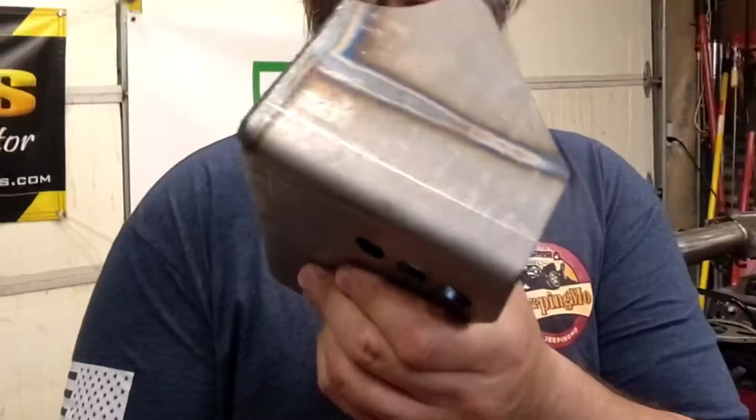Today on Jeepingmo, we're welding on track bar brackets. We had a friend of the channel reach out to me, wanted to know if we could weld on a new Synergy track bar bracket on his JK Dana 44 housing. So, always sounds like a fun project, Jeep related, and we all can learn something by it.

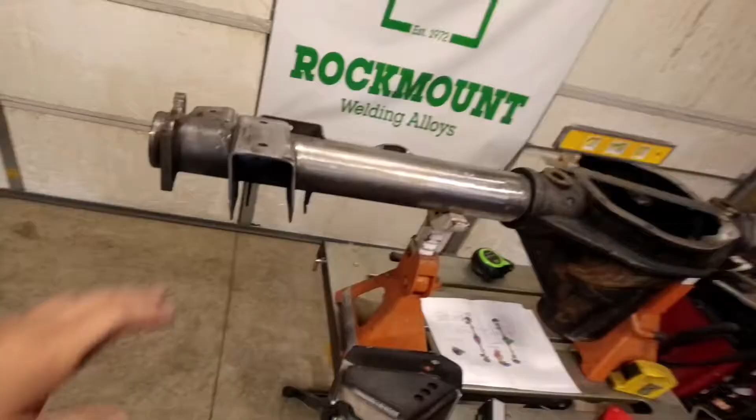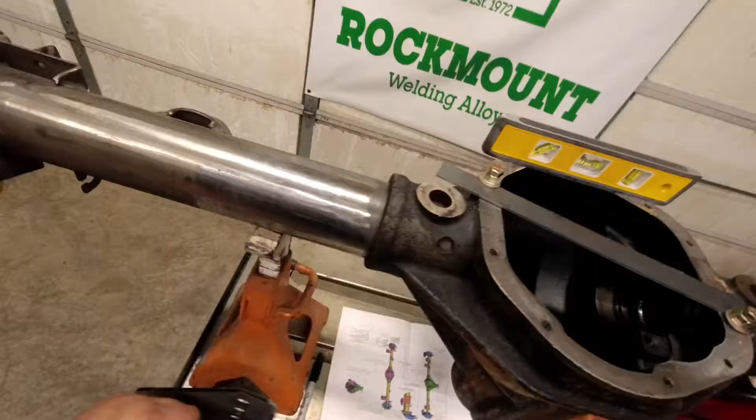Alright, so he brought over his Dana 44 housing. It's kind of nice, he's got it all stripped down. It's amazing how much lighter these housings are when there's nothing in them. So we're going to go through, show you how to locate it. And then we're going to take the housing. We're going to get it mounted.

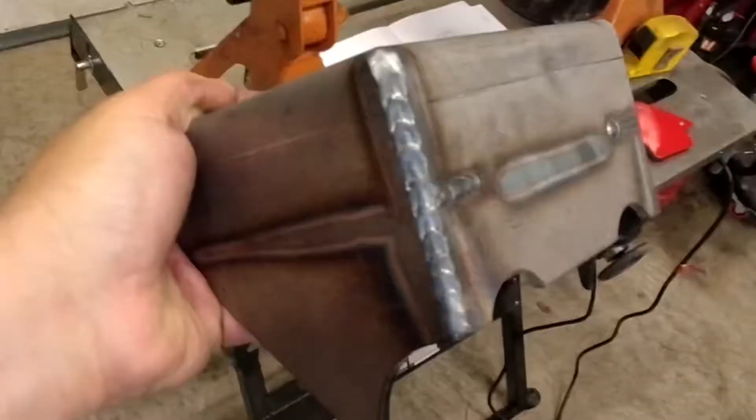Now one thing I'll say right off the bat, Synergy did a really nice job with these welds. And they also give you a really good blueprint on where everything goes. Now we're just doing the track bar bracket. We're not putting on the rest of the spring perches. He's keeping all that in place. So let me show you the MIG wire we're going to use and get this project started.

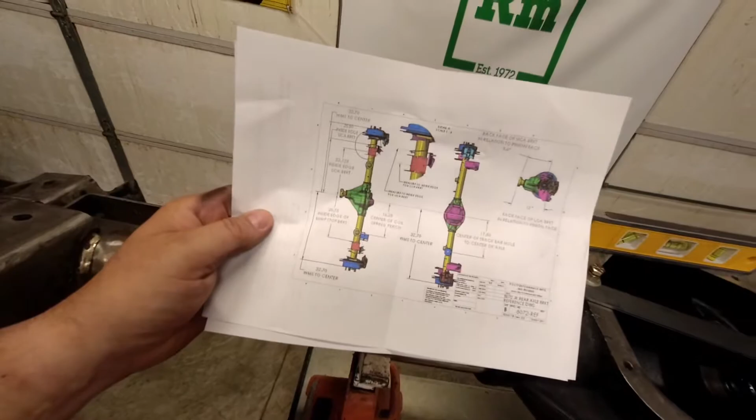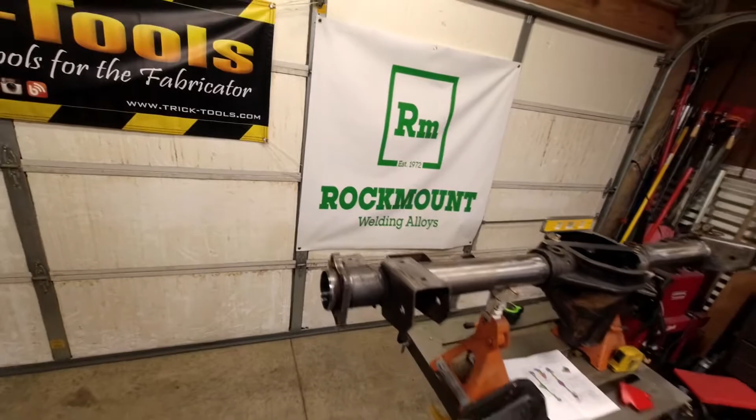Now for most general purpose welding I use this Blue Demon, and it's the ER70S-6 wire. So since we're a Rockmount affiliate and we knew we had some axle projects coming up, they sent us some of this Polaris MIG wire.

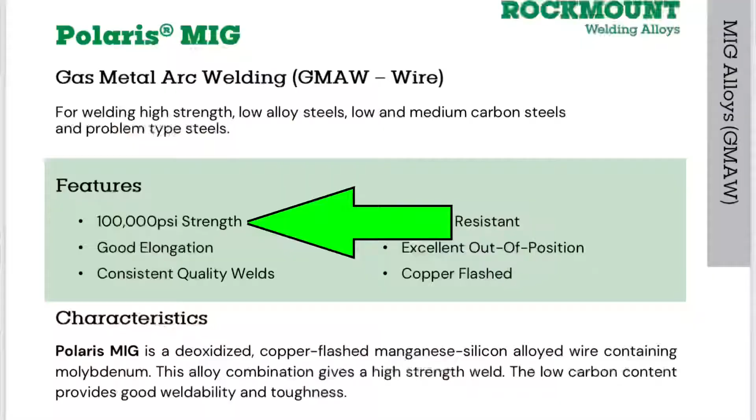Blue Demon has a 70,000 tensile. The Rockmount has 100,000, and we all know that we abuse these track bars to no end, rip them off on the trail. So we're going to put this wire in. We're using an .035 wire. That's what the welder is already set up for. We just got to change it out. We'll do a couple sample beads just to get all the settings in, and then we'll get this track bar located.

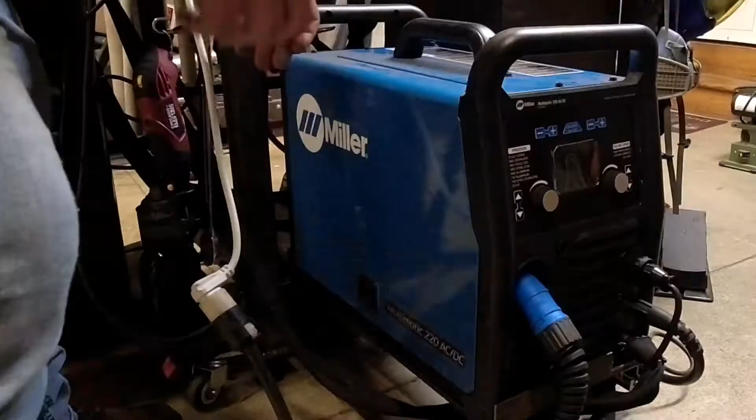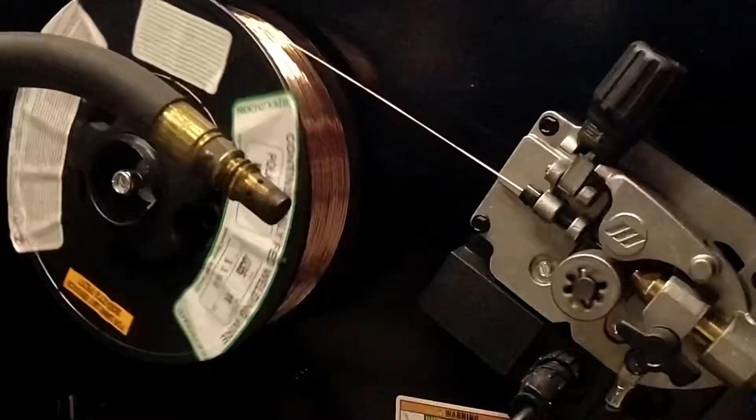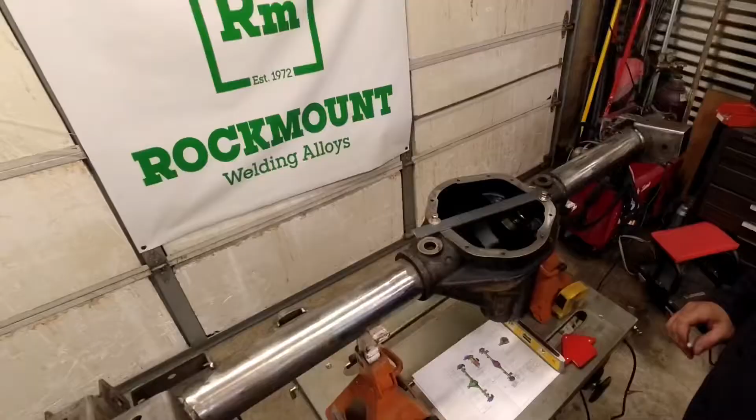Okay, so I always do a test piece before I do anything. So let's get this track bar located and get it glued on. Alright, so it's a fairly easy layout project. Now since everything's stripped down, I can't measure to the outside wheel mounting surface like the instructions say. Per the instructions it says find center and then come off that 17.5 inches. So since it's center, I don't have to worry about it. I'll come off of the flanges to find center.

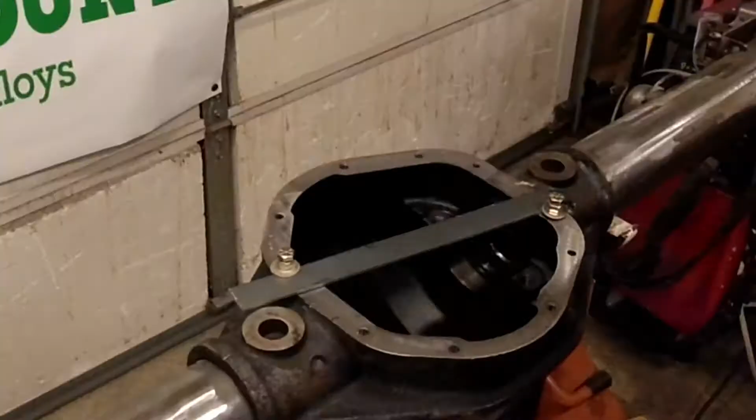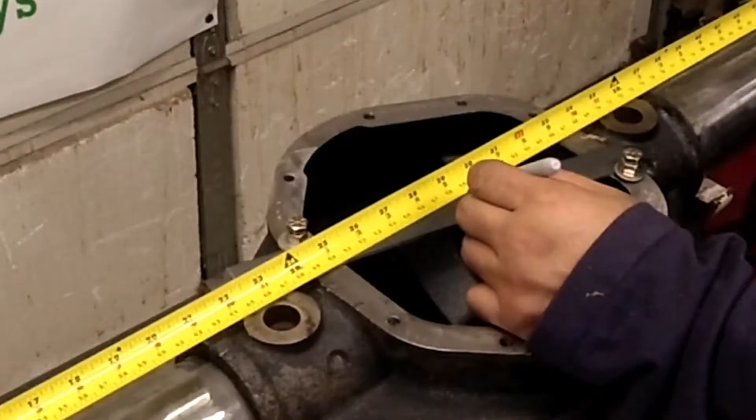And I don't have a cover, so what I did, I just cut a piece of steel and just bolted it down in center. Now something pretty cool from my woodworking days: I got a centering tape. So it says 58.5 inches on the upper scale, so I just come down here on the lower scale and it says 58.5 inches, which is 29.25.

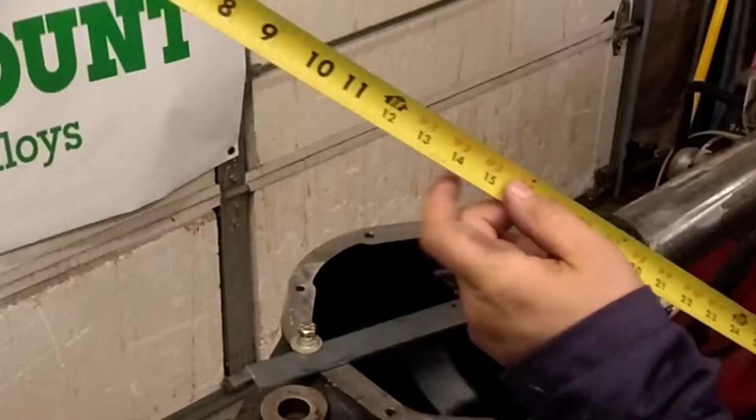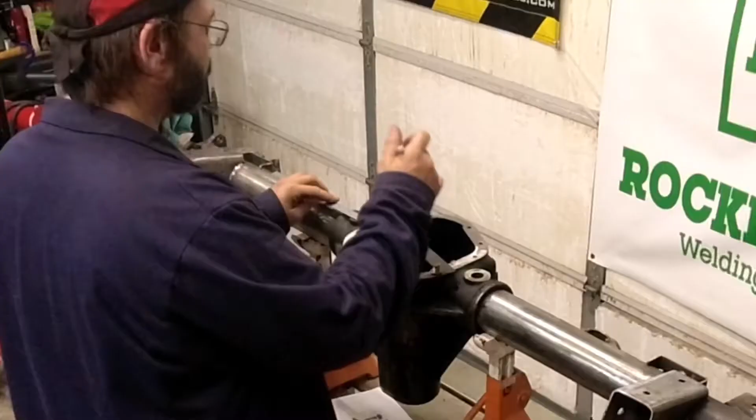And the easiest way to double check that is come from one side, so you're right about 29.25. Come from the other side and about 29.25. So we know that this is center line, and then according to the instructions it says come out 17.5 inches. Alright, so we're just going to come off 17.5 inches to the mounting holes of the track bar. Per the instructions, it's 17.5 inches from these holes to the center and leveled with the spreader locations.

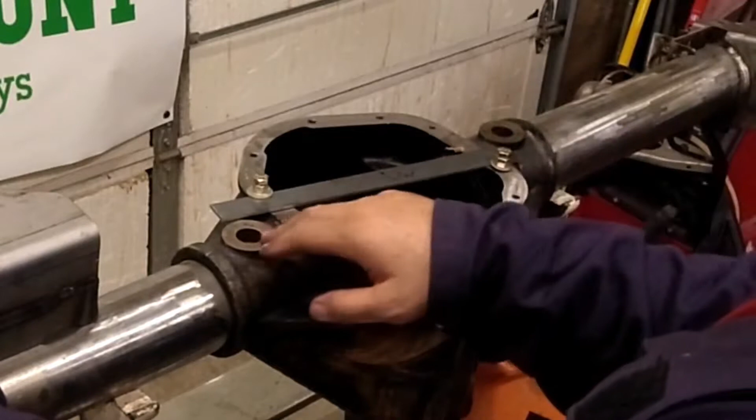If anybody ever wondered what these two big lugs are for, that's so that you can put a spreader bar in here and open it up to put your gears in. Also called a K-bar or whatever you want to call it, but it's made to go in these to open the case up so you can get your gears in. That's what these are for.

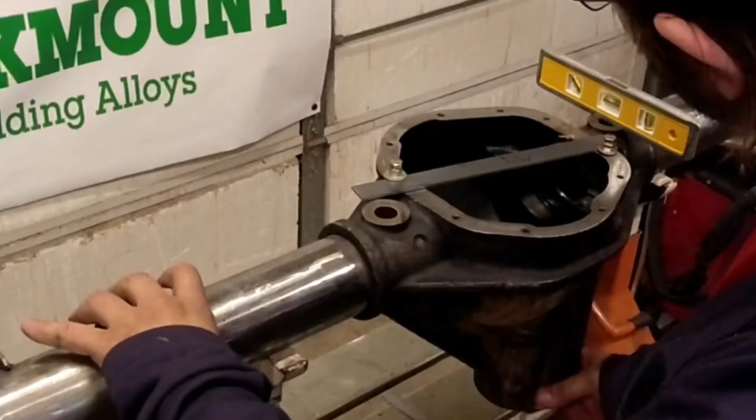So I've already got the axle level one direction. We're just going to level it the other. Now since we don't have to do an actual degree, using a level is fine, but we'll use digital as well. So we'll just come in here and we'll level.

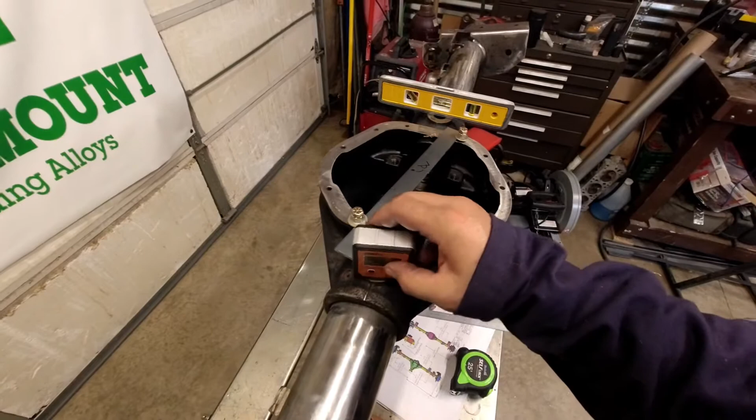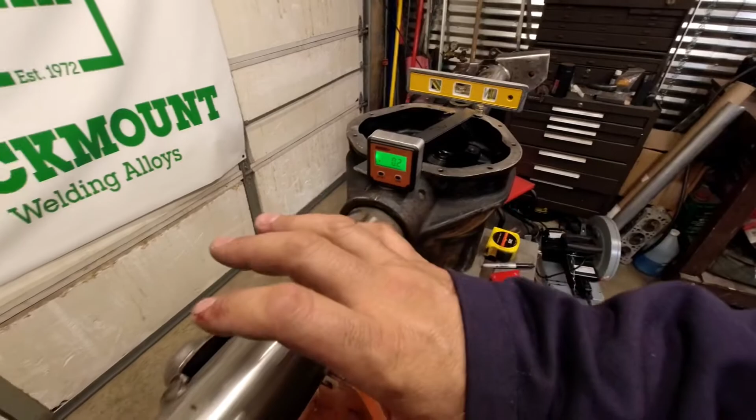Now we've also got a digital gauge that we can come in here and set on there as well. It's pretty touchy. So we're 0.02, and then what we'll do is we'll set the bracket on here and make sure that we're still level.

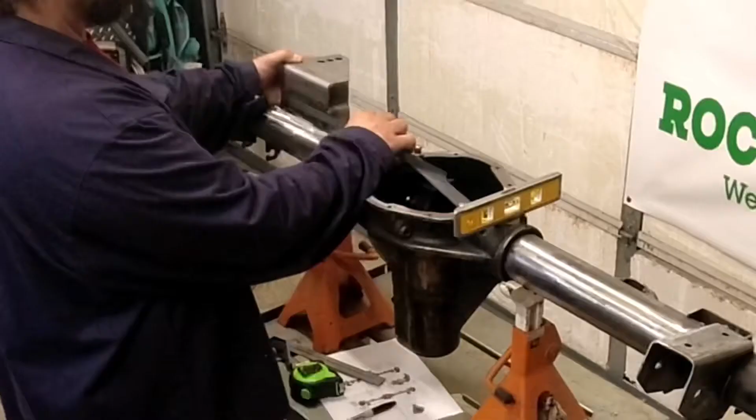To set this on here, I'm just going to line up that line. I'm just going to take a quick measurement just to make sure that we're 17.5 inches. So that's rough location right there. I'm just going to put a line out here on the edge. We're level. I'll put the angle gauge on this, and we're going to tack this dude in place.

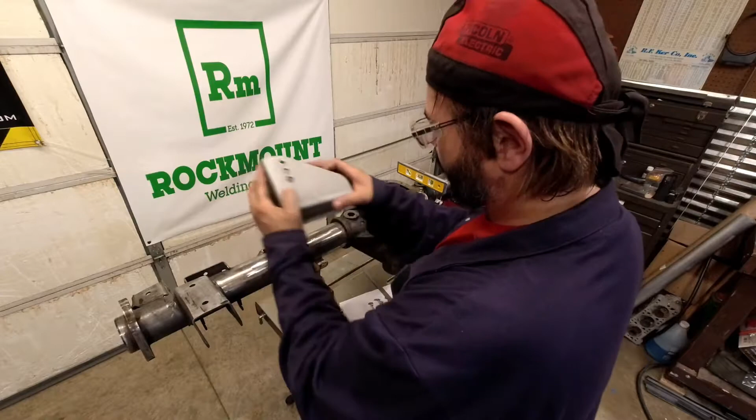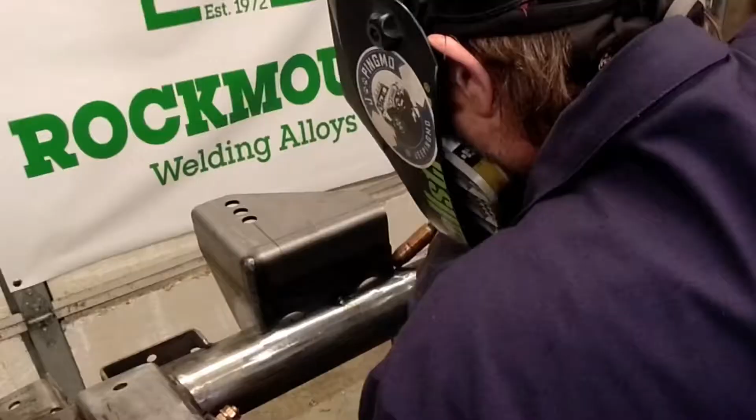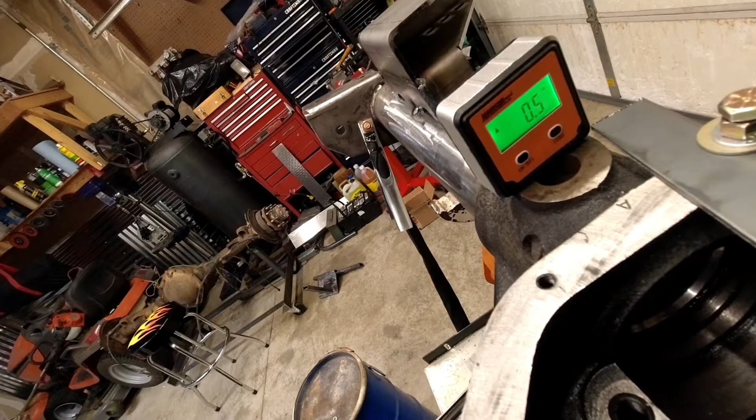To 0.6, you see a little arrow that's up. So you have 0.6 with up arrow and 0.5 with an up arrow. So I think we're good there. Now one last check. So to the center line there, we're right at within about a 1/16 of 17.5 inches. Remember, your track bar is adjustable. You could be off quite a bit. And if you don't have an adjustable track bar, you need one anyway.

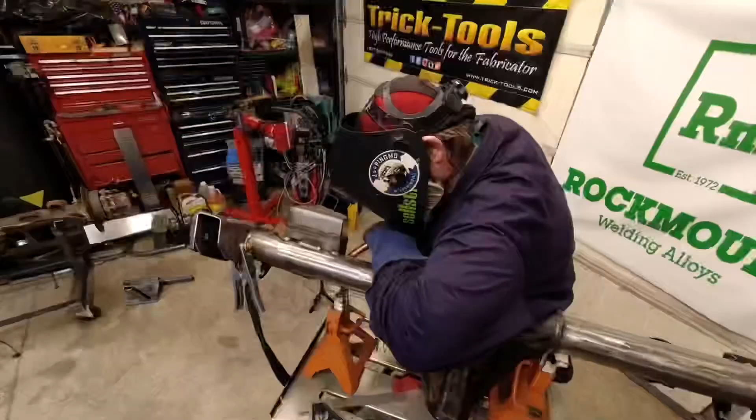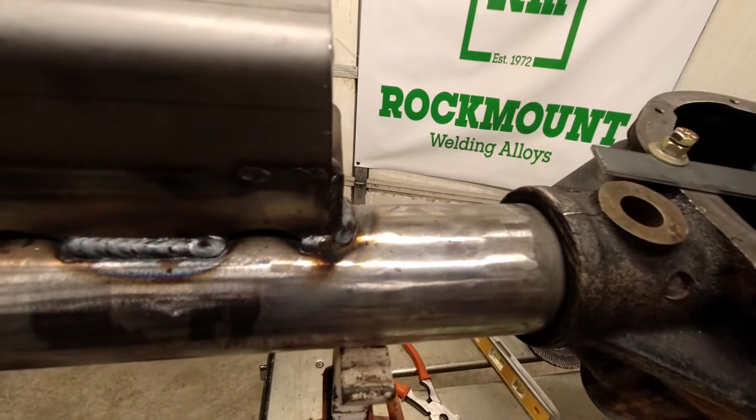Alright, so we got the track bar all welded on. I've not done any cleanup on it yet. You can see the settings must have been pretty close to being right. That coupled with that wire, there's not a lot of spatter from the wire itself, from the weld.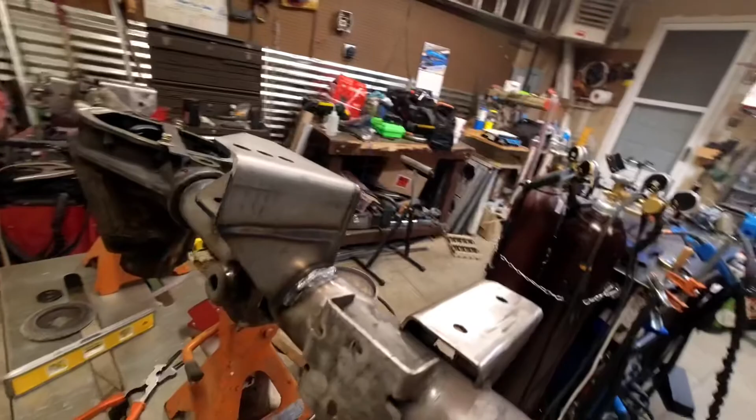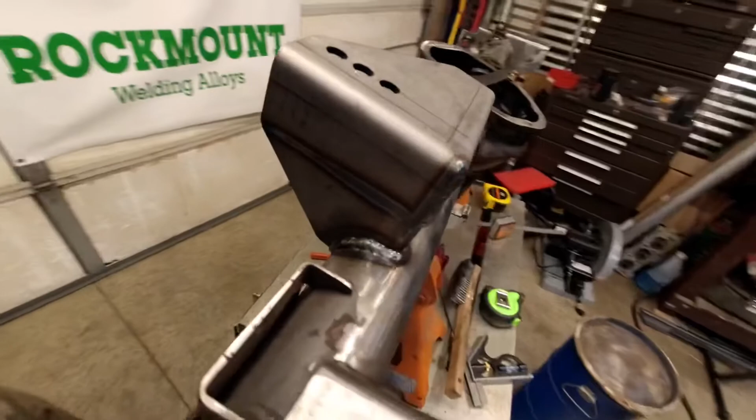So we welded it all the way around. Had one corner that gave me a little bit of trouble. That's what a grinder's for. We took that off. But I think overall it turned out fairly well. All right, so we're just going to do a little bit of wire brushing on it and have them come get it.

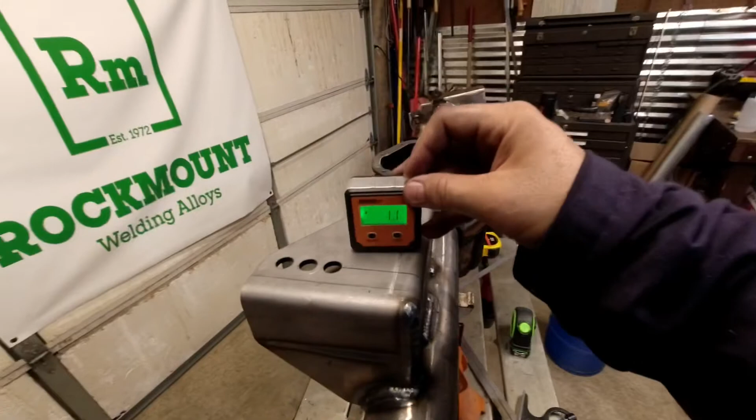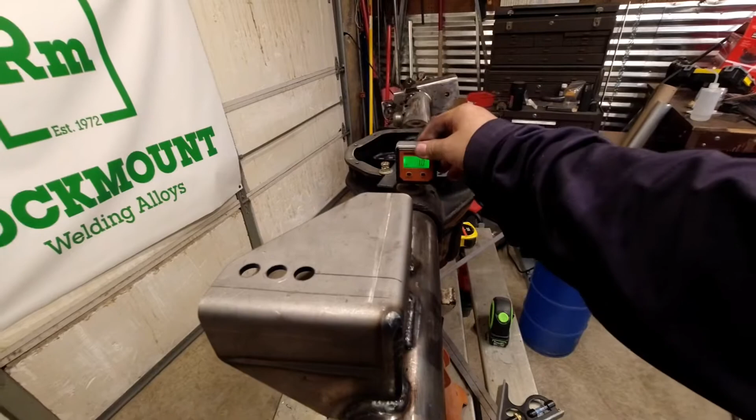Okay, one last thing. So if we zero this out, we're 0 there. On the lug they want you to level to, it's dancing around from 0 to 0.2. So I think that that's pretty good.

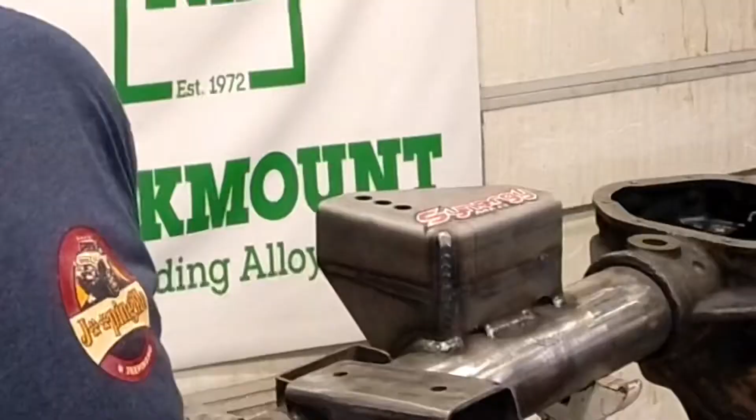So that was welding on a Synergy track bar bracket on a Dana 44. I don't know exactly what year JK it's going under. The biggest thing is prep. Luckily, when they brought it over, it was pretty much all cleaned up and ready to go. So I just did some light cleanup on it and laid it out and got it in place. And we did use that Polaris MIG wire from RockMount.